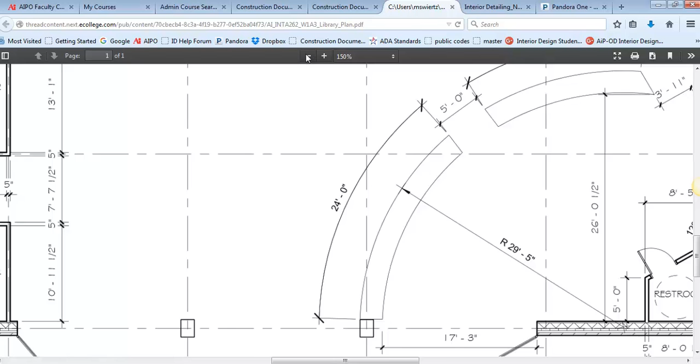So in looking at this, the information that's given to us on the PDF, let me back this out just a little bit. What we have is we have a radius of 29'5", and we have the lengths of these arcs and also this middle section and these two arcs, and this appears to all be on one circle, so we can work with that kind of assumption.

We also know 2 points on the plan where it hits precisely. So we know that it hits at the corner of this column, and we know that it hits at this point that's 3'11" off this wall and 26 foot 1/2 inch off of this wall. So I'm going to kind of start with these assumptions. The other thing that we do know as well is that the depth of this is 2'6", just based on the location of the corner of this column and this 17'3" dimension.

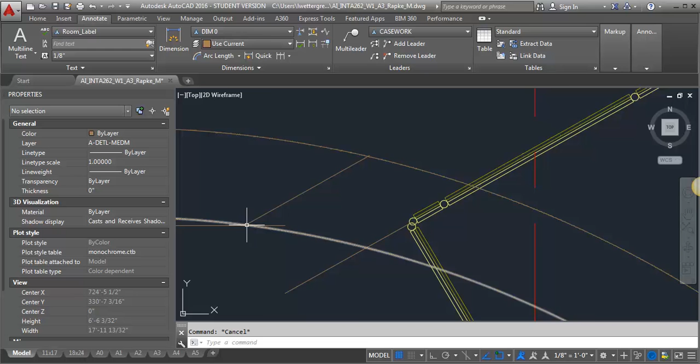So I'm going to go back into AutoCAD here. And what I've done, I've drawn a circle that has a radius of 29'5". I've offset that circle by 2'6" to get that inside dimension. I've also located that point that is the 3'11" and the 26 foot 1/2 inch is right there. And I also know that it intersects with this column. So what I did, I drew a circle out over here.

And the other thing I did is I kind of eyeballed where the center of the circle was on this PDF. So let me zoom in here again. And you can see that the center of the circle hits somewhere kind of inside this wall, just a little bit to the left of that little restroom wall.

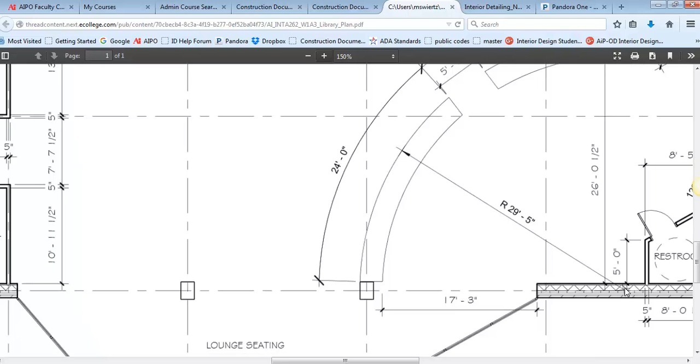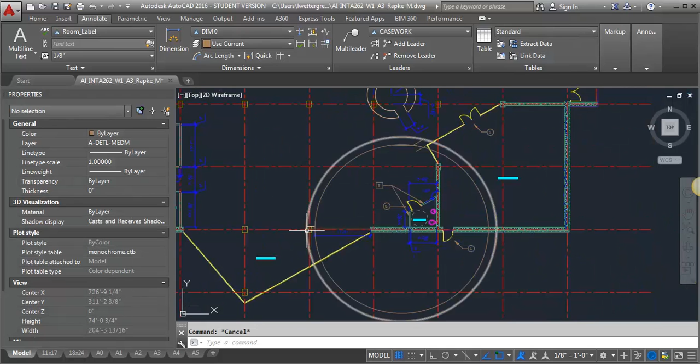So, you know, this part of it is the least precise part of the whole process, but all that I did is I just kind of kept moving the circle around a little bit, and I drew this line so that I could have a reference to my center point, so that I could get the center point about right. So I kind of put that in there, and then I scooted it around until I was pretty close. You know, I'm right on this corner, and then this point I'm pretty gosh darn close on. So I called that good enough.

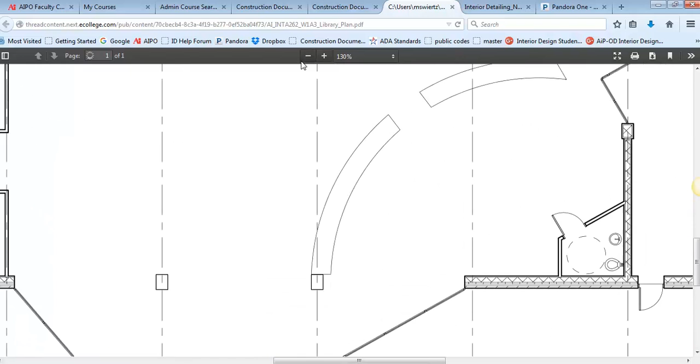So what I want to do next is I'm going to try to figure out, let me go back to the PDF, let me back up here, the best thing to do is to find out what the angle is. I've got the length of this arc. What I need to know is where this line comes in based on the center of the circle, and this line as well. So this involves some math. And I will attach the math as well here.

What I know about the circle is I know the circumference, which is the distance all the way around the circle, is 184 feet 10 inches. And I know this from AutoCAD. What I did is I selected my circle, I looked at the properties, and it's telling me my circumference. I rounded up just slightly.

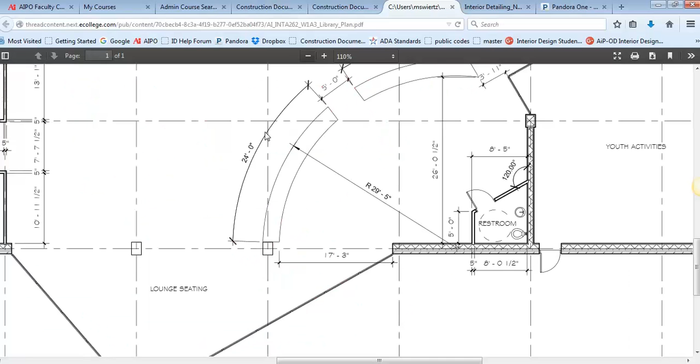And what I also know is that my first arc is 24 feet long. My second arc is 5 feet long, that's the opening, and then my third arc is 18 feet 2.5 inches, and those are the dimensions that are given here. So I can try to find the angles between those.

So with a circle, if you've got that length of the arc and you've also got the circumference, you can find the angle by comparing the length of the arc to the circumference. So I changed everything into inches just so I didn't have to worry about trying to work with feet and inches. So I took this first arc, which in inches is 288 inches.

So it's 288 inches is to the 2218 inches, which is my circumference, as this angle that I'm trying to find is to 360 degrees, which is the whole circle. So I solved for my angle and found that it's 46.74482.

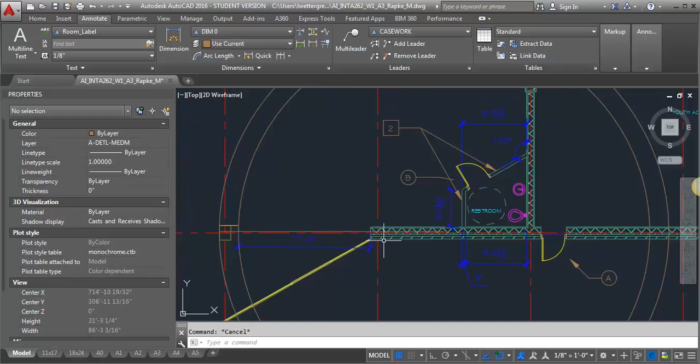So I'm going to go back into AutoCAD here, and I'm going to draw a line from the center of this circle to this point where I know it intersects on this column. Then I'm going to make a copy of this line and put it right on top of itself. And then I'm going to rotate it by that angle.

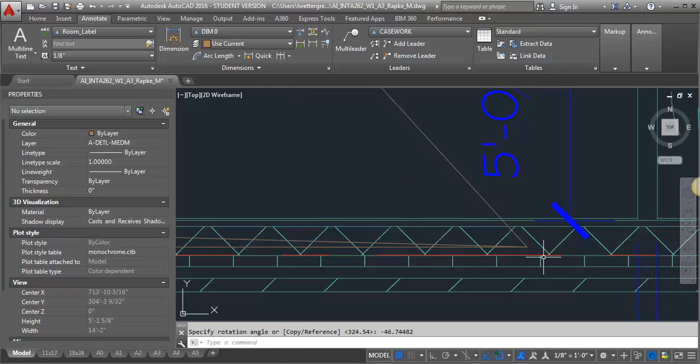So I am going to go back and look at what my angle was. So I need that to be 46.74482. So I'm going to go back into AutoCAD. I'm going to pick one of these lines and I'm going to rotate it based on the center point. And so I'm going to rotate it. I'm going to go minus, because I'm going clockwise, 46.74482 and hit enter. So that should give me the edge of that first arc.

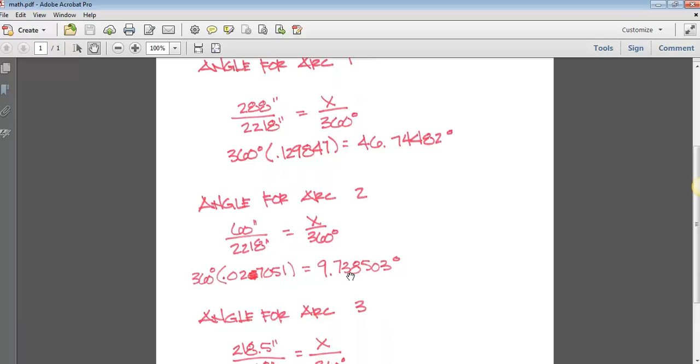So now I'm going to do the same thing again. I'm going to solve for the angle that gives me the opening between the two pieces. So I'm going to take my 5 feet, which converts to 60 inches, in comparison to the circumference, as x is to 360, and I'm going to get, let me jot this one down too, 9.738503.

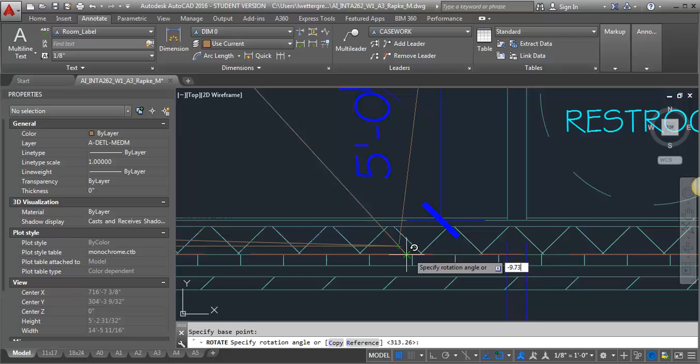So I'm going to do the same thing again, go back into AutoCAD. I'm going to copy this line this time because I'm going to keep working around. So I'm going to copy that, and then I'm going to rotate it. And again, I'm going to go minus because I'm going clockwise. So minus 9.738503. Okay.

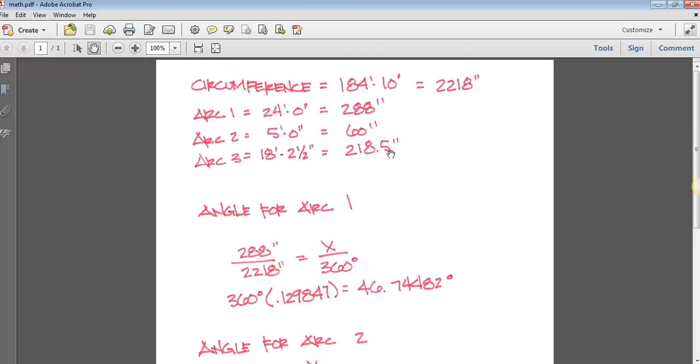Now I'm going to go ahead and copy this line, and then go back into my math sheet, and I'm going to solve for that last angle for the third arc. So I'm going to take my 18 foot 2.5, convert it to inches, so it's 218.5. And this time when I do the math, I'm going to get an angle of 35.46438.

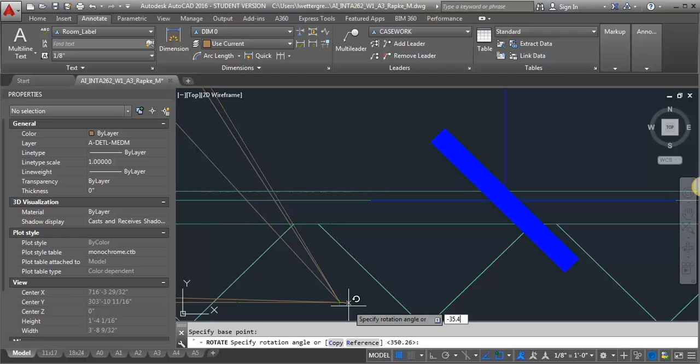And feel free to just take these angles and use them, but I wanted to show you where I got them from. And I'm going to rotate this line that I've already copied, and I'm going to go again minus 35.46438. And then what I should be able to do is just trim. So I'm going to go into my trim. I'm going to select these lines that I've drawn, and I'm going to trim.

And then I'm just going to check my arcs here just to make sure. I'm going to go into dimension, and I'm going to check my arc length. I'm going to check my first one. Whoops. Let's try that one again. And if I zoom in, I don't even really need to place it. See, I'm getting my 24 feet. And then if I do my arc length over here, I'm getting my 18 foot 2.5 inches.

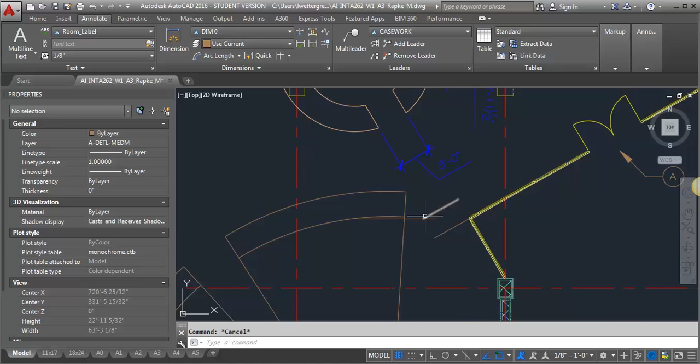So then you can go from there, and you can draw in. Actually this one I shouldn't have trimmed there because it's actually on this angle, but you get the idea. Let me just do this and then go perpendicular to this one and extend. Okay, so that'll give me the line on that one.

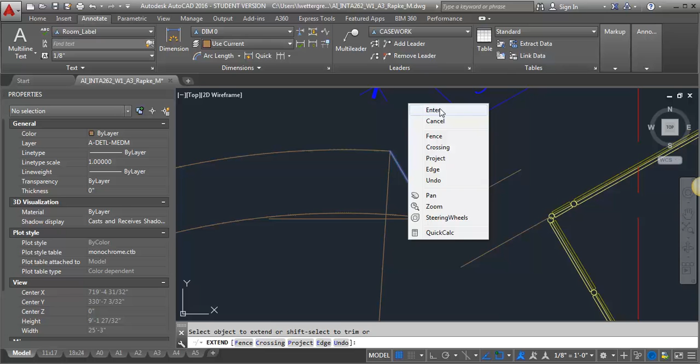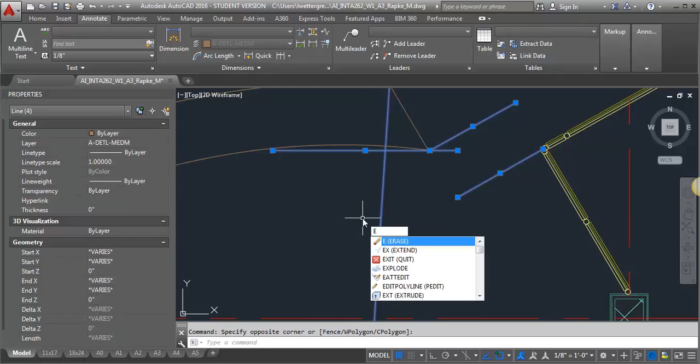And then you can just trim off the lines from the angles. I guess we don't need to trim that one because, like I said, that one's on a different angle. And then you can get those pieces and then get rid of all of your reference lines. And that should give you those two pieces of millwork that are there.

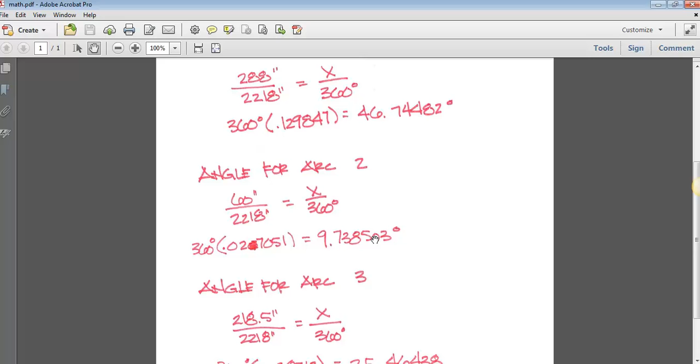So give that a try. I know it's kind of a lot of math, but like I said, I'm going to attach my math sheet as well. You can just use the angles. Draw that circle first, try to get it in the right spot, and then use those angles and rotate the lines. But I did want you to kind of understand where I had gotten that information.